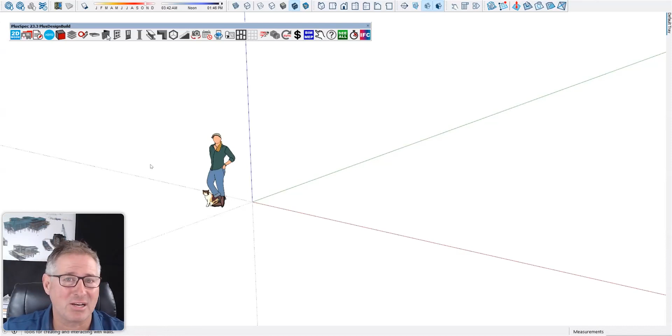All right, I'm with Grant. Grant, what we might do is start with steel frame. A lot of our users have asked for it, and I'd like you to start showing just a couple of things on steel frame. So maybe just draw 2 walls and put a window in or something like that.

So first thing you do is you go down to framing. Select here, go to the steel option. Then update all your options in here. You'll have your steel materials in here that we've got. Select all your materials, go down here, make sure everything's all good, and then we can start drawing.

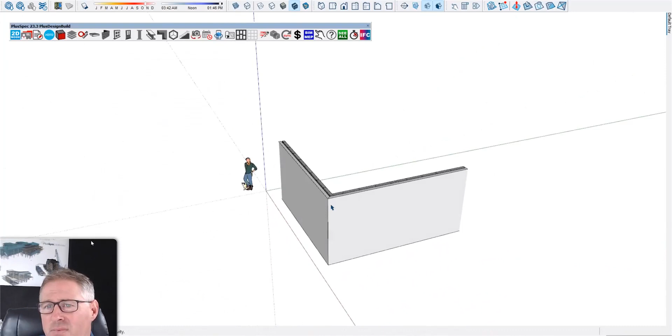So just draw 2 walls here. I'm drawing the wrong way. I'm pressing insert. Down arrow 2 is what you just did too, so down arrow allows you to justify internal, external. Insert or down arrow, guys. So insert will flip the direction, then down arrow will change at what point you're drawing the wall from.

Let's zoom in on that frame. Right, you can see it's all C-section now.

Can you just quickly make one of them a gable? Yep.

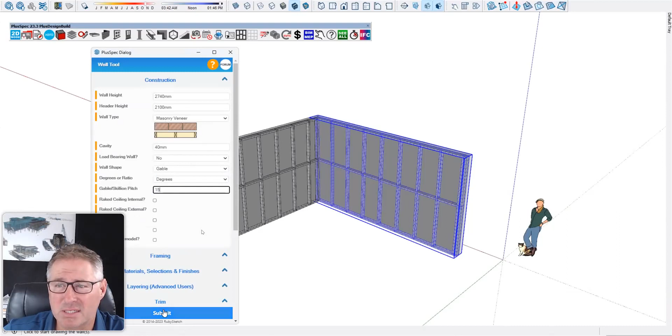Now, this will still work in the Takeoff, guys. We are working on an export that enables it to be used with a CNC machine. So if you guys are using CNC cutting machines, it'd be nice if you gave us some feedback to see if we can help you out.

Right, so basically this is the way that steel frames. Now, guys, just to be clear, I'm not a steel frame expert. To be honest with you, I don't really even like them, but I know you guys do. Add a window, Grant.

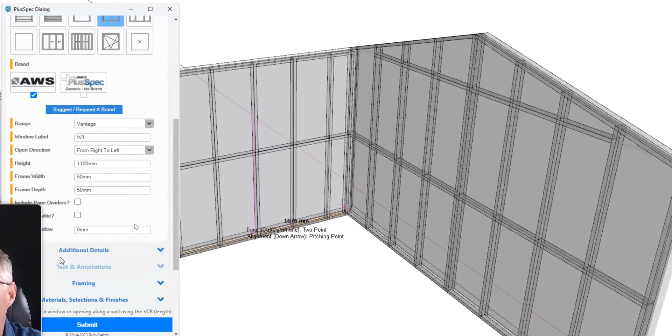Maybe a trussed header. So truss here.

Okay, let's have a look at that. Can you just turn your cladding and stuff off so we can look at it from both sides? Just create some scenes.

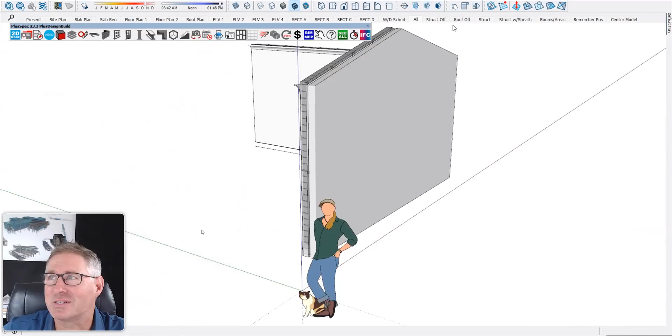Guys, I'm not sure what stage you create scenes, but it's really important to create scenes early on in the piece because it enables you to work faster. Go to structure. It also makes your computer run quicker.

So if you've got a computer that lags a little bit and you create your scenes, basically we're dealing with less geometry. So if Grant went to all now, they'll see all, that'll do. It takes a lot more for SketchUp to actually show us that than what it does to actually show the structure. So just a little tip there.

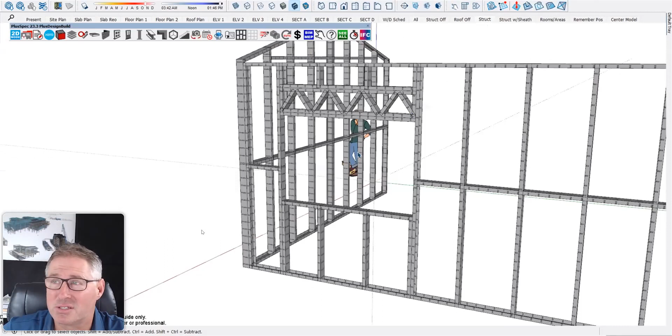Right, so that's our steel framing. You can also put battens off the side of the steel frame as well. Do you want to do that? So I'll explain it a little bit.

So steel framing, and you've got battens, and this is probably going to be... that's all right, just do it anyway. Okay, he's done them on the inside.

Guys, if you're in Australia, you'll probably know that the code has changed and really having problems getting steel batten walls to steel frame walls to comply with the code. So you have the option to choose timber or steel battens.

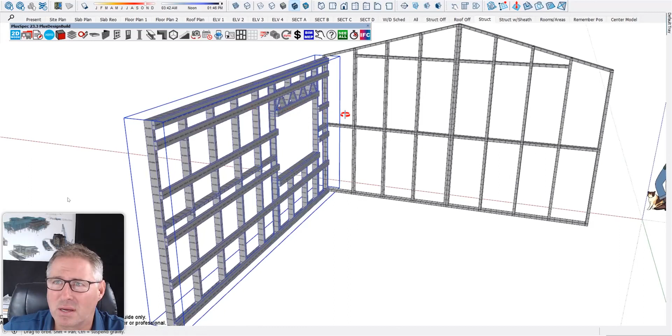Grant, there was a little bug that we just picked up there. Was that just not on the outside of the wall, or? Just with this wall type. Okay, just that wall type. This is a brick veneer wall. Okay, right, it's a brick veneer wall.

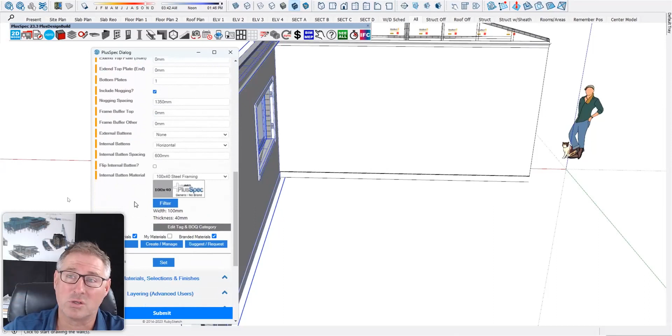So if you went to clad wall, you'd have the option to add it. And guys, you're going to need that. We're also working on aligning battens to studs. So for instance, if you've got a drop off, you're going to want your timber batten to probably go to your drop off, but we'll have an override as well. So either your timber batten works to your drop off, or it will work to your step down for your concrete slabs or joists. Just put the timber batten in there, mate.

If it's not there yet, we will be adding it. Is it there, Grant? Can you add timber battens to that wall? So I added steel battens to that wall just to show the steel on both sides.

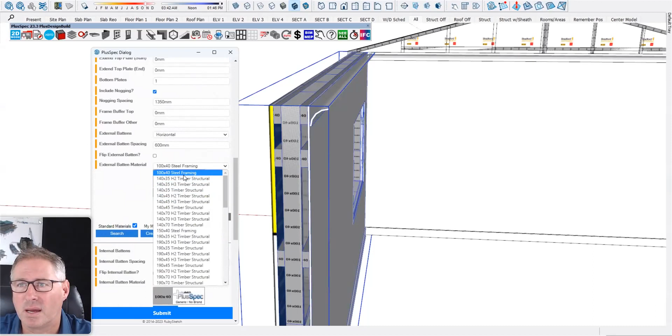Scroll back down. External is this one here. Yep, we can add in timber, they're all on the same list. Add in timber, make it a 70. Some of that we're used to seeing, it kind of looks weird. Yeah, this one here, that'll do.

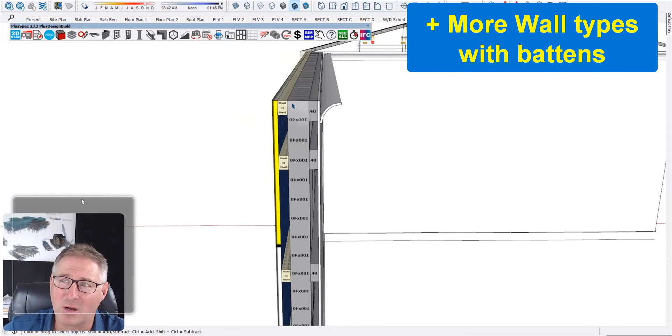So basically, if it was a vertical batten, you could get that to comply, or you can insulate in between it. You're not getting conductivity between the external and internal, and I think you'll find that most steel frames these days actually have to have battening on the frames to get them to comply. So that's why we did it, guys.

Grant, have we done trusses yet, or is that still in the works? Still in the works. All right, so trusses will also be done in the future. Give it a test out, guys, any feedback much appreciated.

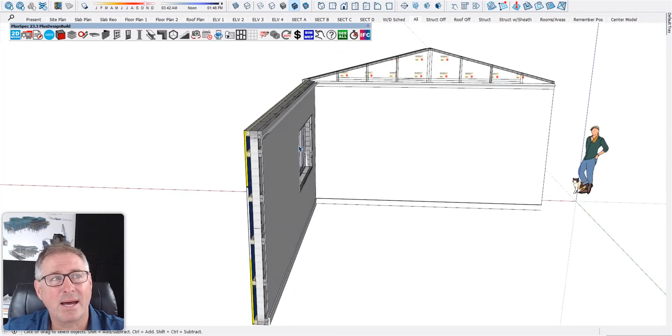So a couple of the wall types we added battens to, the internal only and double internal masonry wall types. So double masonry, and the reason being is similar, so a lot of this comes from Passive House guys that were doing special insulated walls. Just draw it, mate, when you can. No, don't just use timber flooring, mate.

Timber, this is a double masonry, so we won't see it. Oh okay, here, right, just the top plate you'll see. So this type of battening actually enabled us to get the R values or the insulation values required for walls, especially with Passive House.

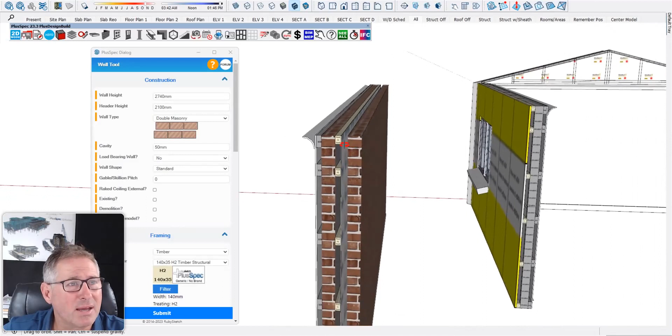What other walls do we have there? We got double internal and double masonry wall types. So sometimes you're going to use a double internal as a party wall, and getting the right information on your party wall was important. So you can see that we've got that battened as well.

And you can save these as vignettes, guys. So if you're doing this standard, you can create as a component, right click, watch the vignette video, guys. This is not a tutorial, it's just telling you some of the major things we've done. And by the way, there's more than 100, probably 150 different changes in this to other things.

A lot of them are bug fixes or improvements in usability, for instance the down arrow for justifying a wall left or right. But yeah, just give it a good solid working, try and break it if you can.

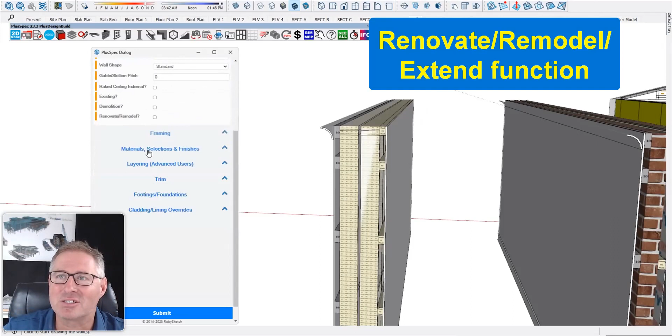All right, the next thing is ability to specify which materials are... okay, renovation and extension. Guys, I've been asked this question a lot of times. Now Grant, just slow down. Right, renovate, remodel, show us where that is.

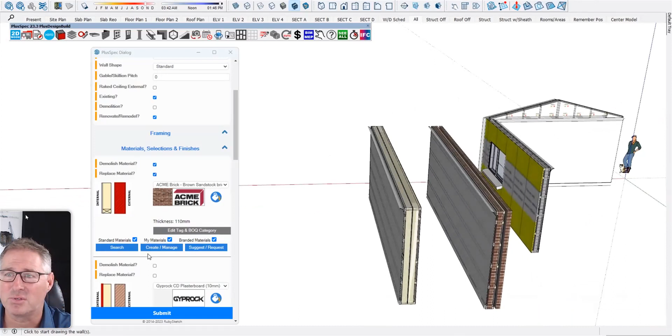There it is, yep, right, okay, click it. So what is clicked is renovation, remodel. And what that's done is it's actually given the ability to click on a demolished material or replace material. So, for instance, you keep going with that, Grant. Just draw that and we'll just do a takeoff of just one. So what he's done is he's demolished and replaced that.

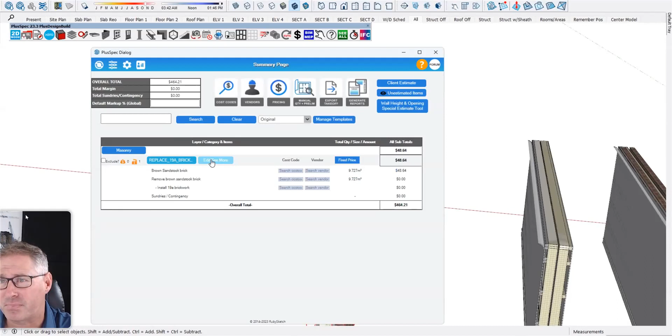So right-click, takeoff selection. The material that he replaced was the masonry, therefore it's quantified the masonry and also said how much has got to be removed. So one's a purchase item and one's a labour item. Throw it in the bin. That's important, guys, and because...

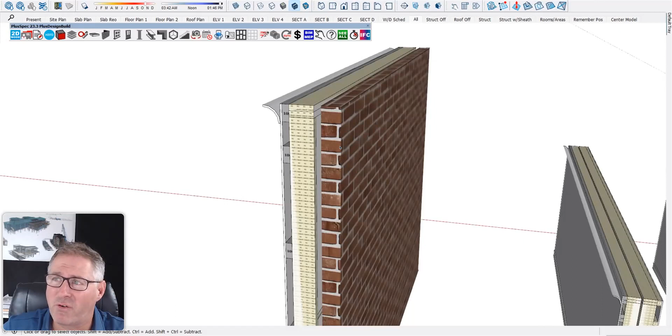Let me just grab your screen for a sec, Grant, let's get rid of that. Okay, so if you're building a house and you had multiple walls and you only need to replace the bricks or the cladding or the internal lining or something like that, the benefit of this is that you can just replace it, quantify it, and it's still locked. So I can't move that wall. You notice it's red, but it gave a quantity out of it. That's a big advantage for you guys doing renovation, extension, remodel work.

So again, we go to the wall tool, and I'll just move this over just a touch because my mug's in the way. Renovation, remodel, click it here. Obviously, if it's going to be demolished, that means you're going to rip the whole thing down.

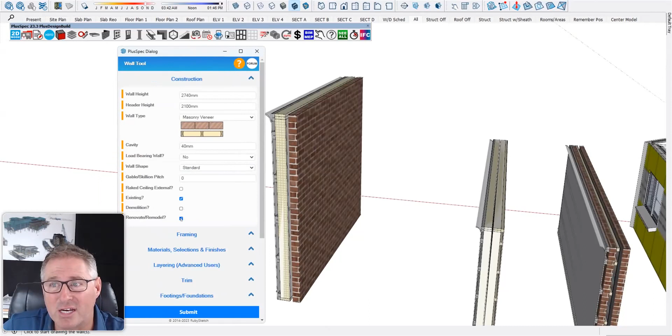But if you are going to just change some materials, again, go to your materials. Inside of your materials, choose which ones are going to be replaced or demolished. So just say the gyprock on this one here, and go submit. Now I should only get gyprock in my takeoff, takeoff selection only.

Internal finishes - you can see it's under replace internal lining. So you're going to remove and replace because I click both to give you the quantities, and that'll get your remodeling extension reno business happening really quickly. I think it's going to be an advantage.

Grant, are they on a layer, or how can you turn those off individually? I don't think they're on a layer just yet. We may do it - let's just get some feedback from our users and see what they say.

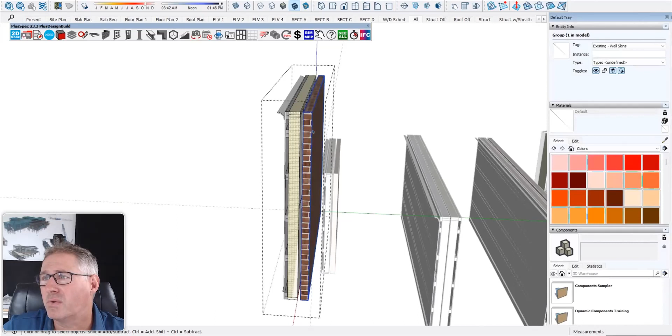So this brickwork here - this would have been 19A brickwork previously. So it's still in the original existing layers. Okay, righto, so we might change that, guys. We'll be open to some feedback on that one.

One thing with that feature as well, it's not just in the wall tool - it's in a bunch of different, like the roof tools and things like that. That's a good point, because you might be just replacing the roof.

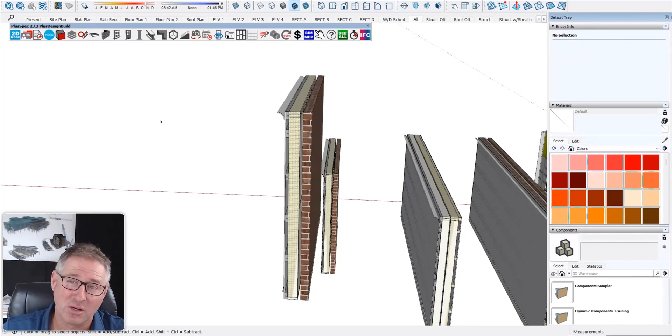If you're just replacing half a roof, guys, you're going to need to use the skillion tool to draw half of the roof you're going to replace, because we can't distinguish on a new roof. But I would probably draw a roof.

I'd probably do something like this - rectangle, let's just say this is a hip roof. Create roof. So this is going to be an existing roof. Existing, go submit, right.

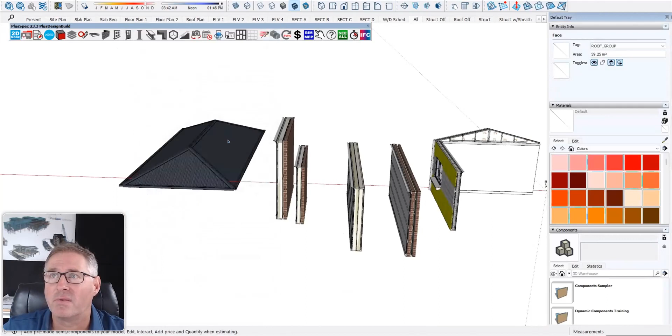But now if we had to replace a part of this roof, one of these sides, it'd be right-click, roof, remove face, isn't it, Grant? Correct, about halfway down there on your right. Yep, remove roof face. Right, and now you can actually see that that's done.

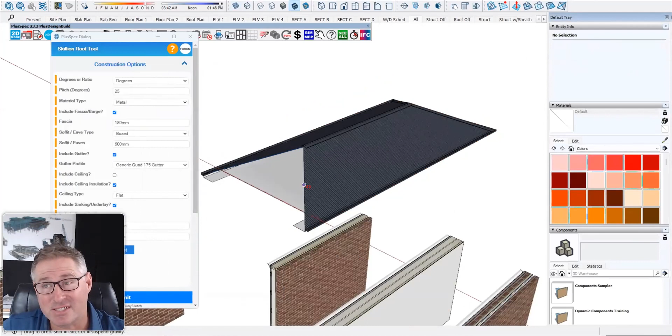And what it's also done is opened up the skillion roof tool, which enables me to do - and this is going to lead into something else as well in a second, which I think you guys will like because it allows you to edit the skillion roof tool. So I could bugger this up straight away by not turning my overhangs off.

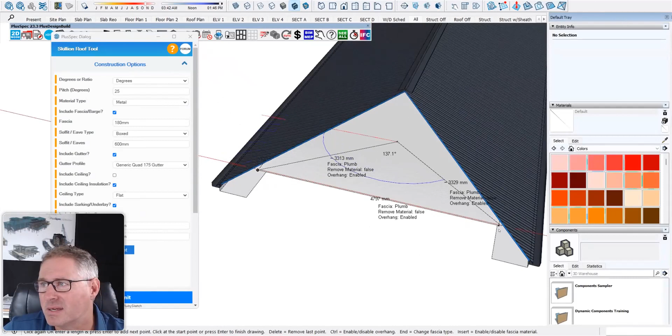And usually here you'd have to push delete, remove, control. Now I'm not going to push control here, I'm just going to quickly get this done. Right, and you can see what the problem was - my overhang was incorrect.

Now if I actually go under here and go right-click roof and edit overhang fascia details, I can now change which side I want to do. Now, as you would know, guys, this would be a huge pain in the bum to do before.

I'm just going to make this 1 mil because I don't think I can go 0, can I, Grant, or can I? You can go 0. Right, you can see that I reduced that.

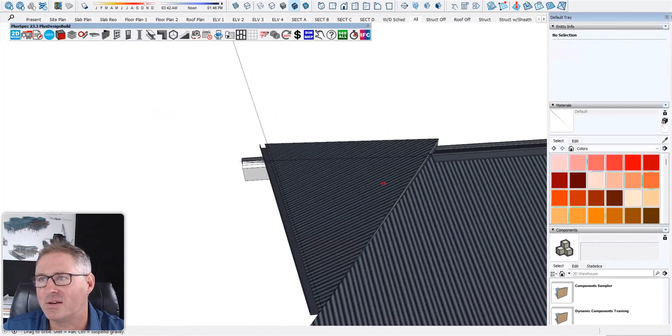Obviously I didn't want to reduce that one, but if I did, I'd go again - roof, edit roof overhangs, and I'll make it a 0. Right, and again I do the same thing, keep on going. This is a huge time saver when you're doing sloping or skillion roofs.

Maybe that was 2 different pitch roofs, I'm not sure, or I didn't draw it right, but regardless, that's how to do it, guys.

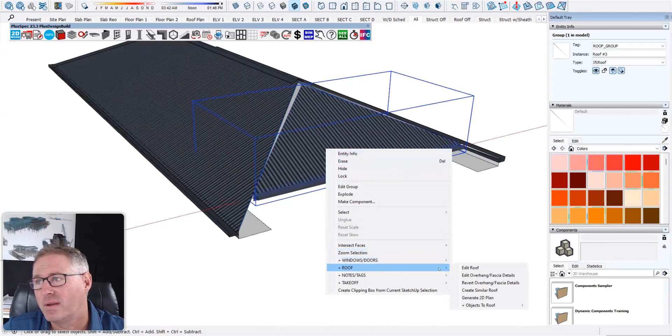But what I probably should have done with this - it's actually a new roof so it's not so bad - I could have edited the roof, and I could have just replaced one thing.

So for instance, if we went to renovate, remodel, materials, selections, and finishes, I can just replace just the tin, and therefore my fascia and gutter would stay. I think that's kind of important.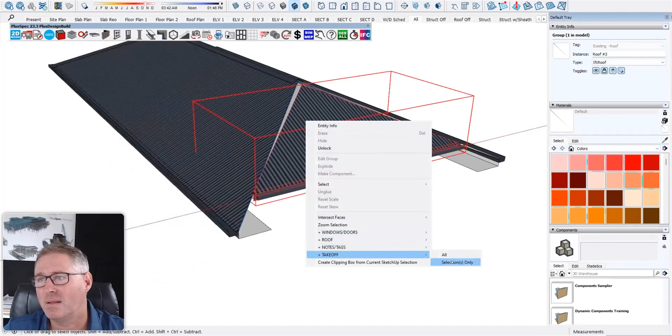Let's just check that - right-click, takeoff selection, roofing. And now you can see I'm just replacing one part of the roof. It's a bit of a game changer for you renovation extension guys.

I think you'll really like it. I'd like to hear some feedback if you've got any. We are still doing a little bit of work on it, but I think it's ready to be released. Grant, you got any objections to that one being released? Nope, not at all, no.

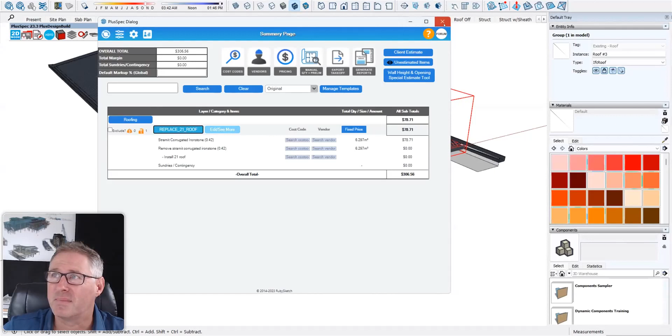All right, good. So that was basically the roof skillion overhangs, guys, and that works whether you're going to do it as replacing a roof like this or whatever it is you're going to do.

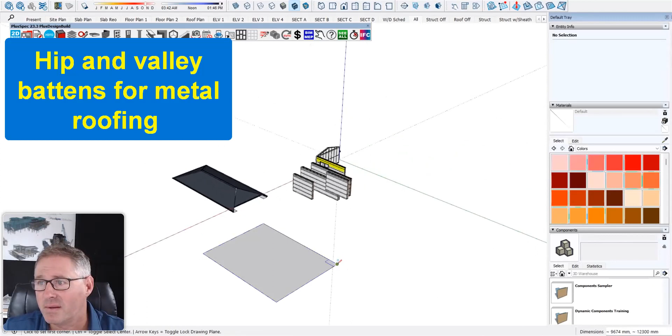That one there works - hip and valley battens for metal corrugated roofs. It's going to be quicker to draw another roof here, isn't it? I think so, yep. This one here was a bit of criticism we got when we were doing videos from the hardcore roofing guys. Create roof.

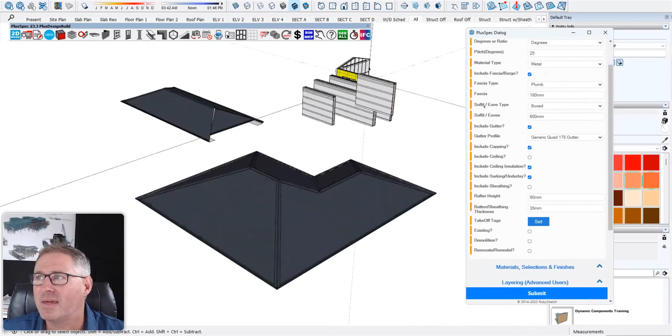I'm going to move this over to here because it's in the way, and I'm just going to create a new roof. And then what I'm going to do is add my battens and my rafters. So triple click to get it all blue, right click, roof framing, create roof framing, which has been there for some time.

However, now we have the ability to add underpurlins, just because I can. We've got our batten spacing and batten offsets, which we haven't marked out yet. You'll notice if I've chosen metal roof, it means I'm going to have a batten offset from my ridge. 160 is usually standard, but depending on the size of the valley boards or ridge capping you're creating, that will actually enable you to edit that.

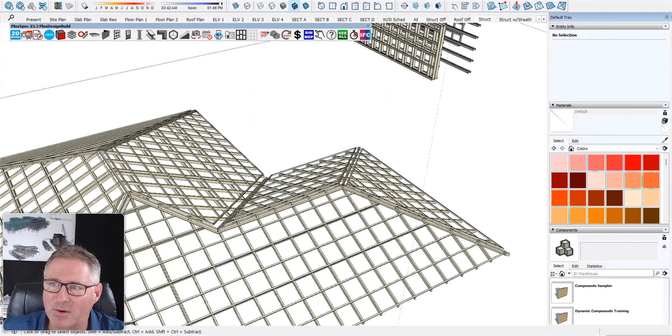Right, and as you can see, we now have battens that go up so we can screw our ridge cap to. On a tile roof that wouldn't happen, guys, so you would choose tile roof if you're doing tile, but your valleys will still happen on tile roofs. One thing to note, they're tagged separately from the other battens, so you know which are your valley battens, your hip battens, and your ridge battens.

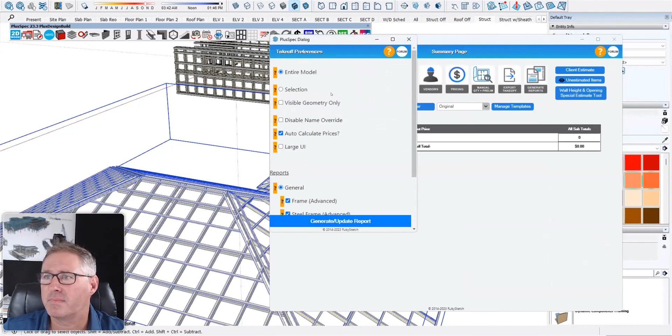So if I went to take off selection only, is that what you're saying? Yep, so I wanted to double check advanced framing is ticked. It is ticked. Good. Yep, I think it's, yep. So I don't need to worry about that.

Framing, edit, see more, creeper rafter - must be right down the bottom of the list. There you go, valley rafter. There we go, those. Right, so that is there. You guys can change the names of these as well.

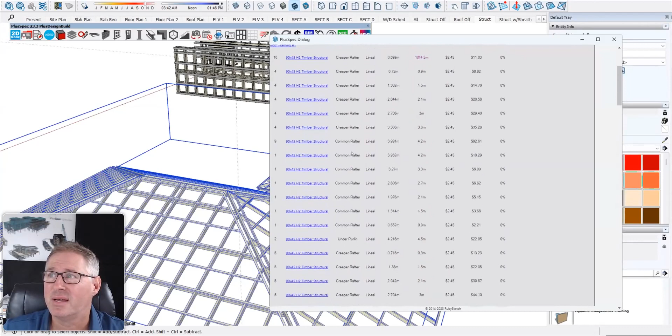Is that correct, Grant? Yep. Okay, so you can go through and change the names of these items to suit what you call them - we can't, everyone around the world seems to call things slightly different. You can also send a cut list of this, a cut and order list. So export order lengths, cut and order list, which basically means what length of timber did you order it from and what you're going to cut it out of, so if you've got guys on site, they know not to cut the 4.2s into 2.1s.

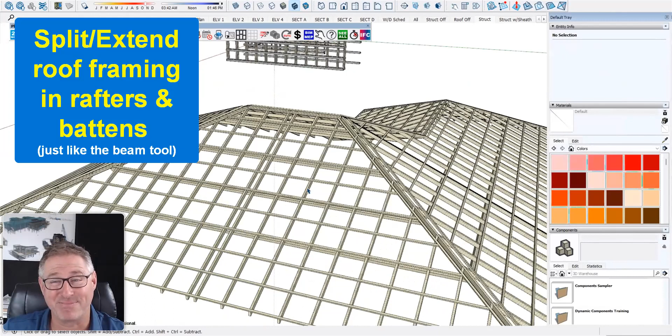Grant, I'm going to let you take over. I'll just close this down for you. Mate, if we want to put in a skylight, it's always been a pain in the ass - can you show us this cool feature we've just added? So for any roof penetration, I'll just talk while Grant's drawing.

Right, you can now go through. So what Grant did - just go outside the roof again, Grant, so we can see that. Just hit escape and get outside of it altogether. Just draw a quick chimney, mate, or a rectangular prism through it so we can see what's going on.

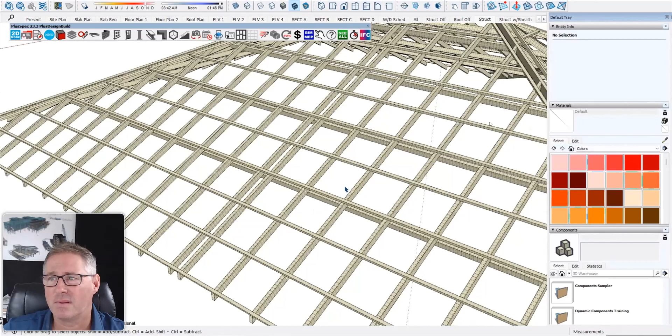Well, don't worry about that, doesn't matter. Oh, it didn't like it. Give me a sec - no, because it's drawn on something else. Right, just move that into somewhere, just at the end of the roof or something. We'll get the idea. There we go.

Okay, so if you had something going through like a Velux or a chimney or something like that, this used to be a pain in the ass. So Grant, show us how to do it.

Yep, so click into the roof. Double click, triple click until you get one thing blue - is that correct? Correct, until you get down to the individual beams or rafters. Right click, so then we select to split it. What you can also do, before I do that, is multiple at once - so if I select, that's handy, two by holding shift. Right click, beams, split beams.

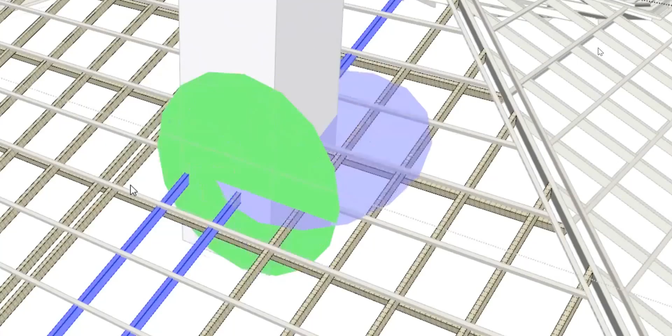And this works the same as how the split beam tool works - exact same. So we find the plane we want to do it to, say to here. Left click, go around the other side, same thing, left click.

Press enter. Okay, now I've got hide rest of model on my computer here, so I can look in just this section. I can now select both of these two, click delete. And now, as I just moved that, you can see I've got the cut in here.

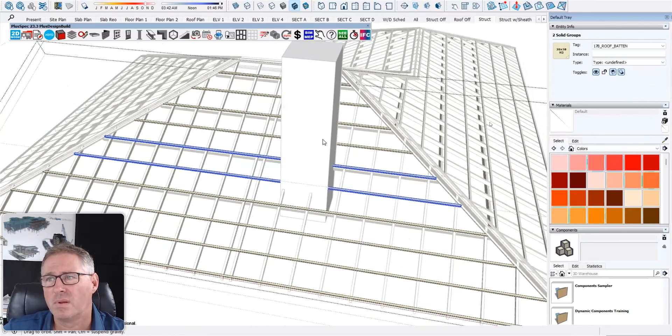Now I've got the battens going through. I'll turn off, hide rest of model. Select the two battens, it's the exact same process. Split them, select your plane, all your planes, hit enter. Again, I'll hide rest of model. Come back, unhide, and there we go.

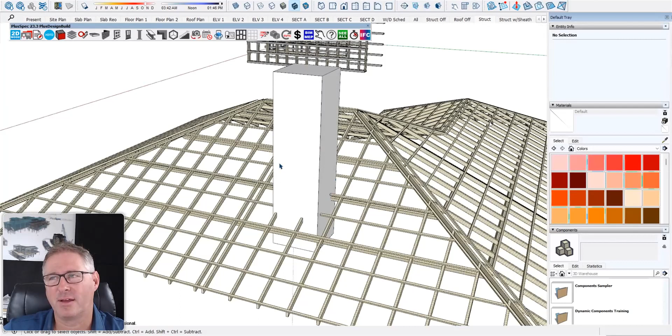So, beam - I usually have a keyboard shortcut for beam, it's B. I'd also say do this as well. Hold on, just slow down, my head's in the way there.

Okay, so takeoff tag - what is this you're doing? So this is for the guys that want things specified in specific areas. If you want it to estimate as a specific member type and then group together with other things, it'll do so.

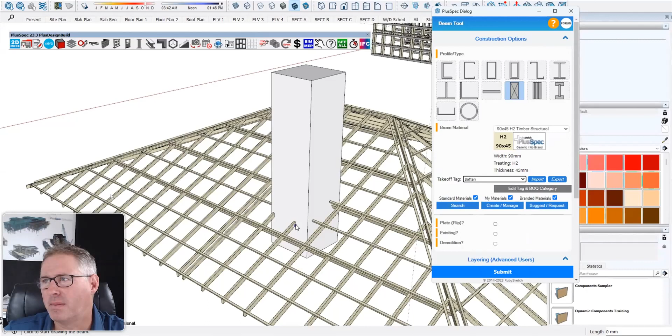Might say do a batten just for now - good idea, top of the list. You're gonna need a batten at the bottom of the chimney there, so I'll just do it here. Just say it's that - you can flip it and do whatever, but then you can move it down into its spot, say it's about there, for example. You can do that all the way around.

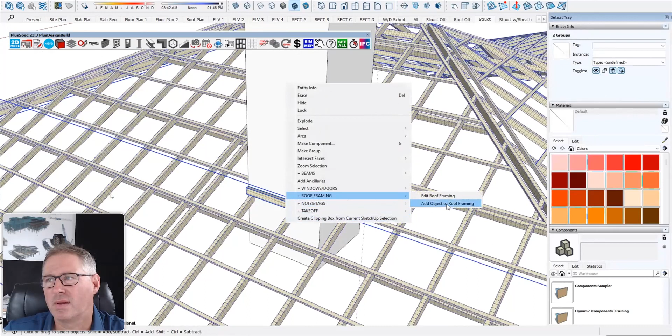Once you have that selected, select the rafters, right click, roof framing, add object to roof framing. Now when you do a takeoff of this, it'll estimate them all together. So if we go into framing here, this is one I just added. If I had named it as test, it would have been called test, but that's the one we just added in there. So it's now grouping itself together so you know where everything goes.

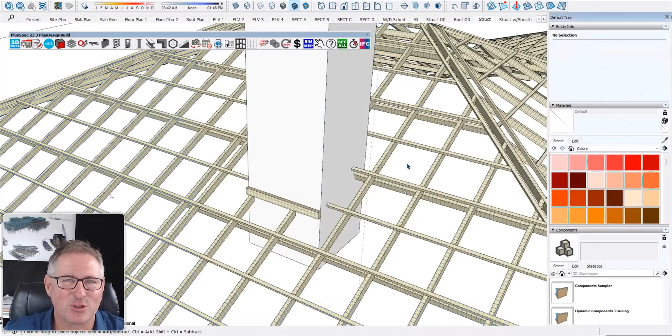So guys, this is about virtually building a project, and that's what we've been banging on about for so long. We're so close to being 100% through virtual construction that it's not funny. We're a big step ahead of the major competitors in the industry that are so-called BIM programs, but they're actually hollow shell drafting programs. So yeah, I think this is a huge benefit to enable us to move forwards.

The only thing we're yet to work on - if you just go all there, Grant - is to cut a hole through the roof. We will be working on that next. But at the moment, to do that, you do need to use a rectangle tool and delete those faces, but we'll be getting onto that one lickety-split. Right, what else have we got? Is there anything else you want to touch on, Grant?

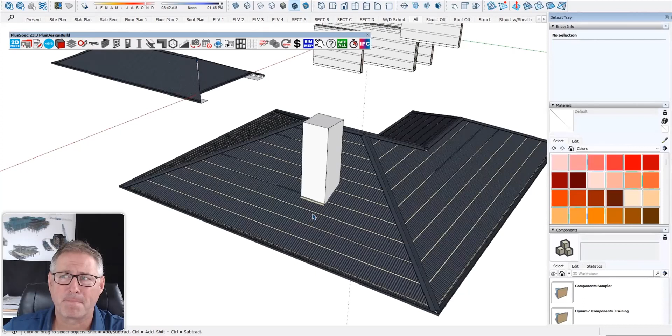Nothing on that - one thing I just thought of back with the skillion stuff. I know previously we had issues where users weren't able to have different overhang sizes. I know you touched on being able to reduce it, but this will allow you to have 0 or the common overhang, and then you might have one that has a different value. Are you talking about on a hip roof or a skillion roof?

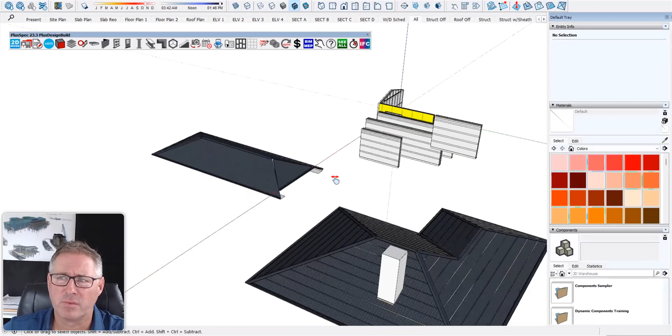Oh, a skillion roof. So just to make my life a little easier when drawing this, if you've got this sort of shape, but maybe this edge here of the skillion has a larger overhang, you can just have one as a different overhang. You don't have to go - just quickly show us, mate. But yeah, I know what you're talking about.

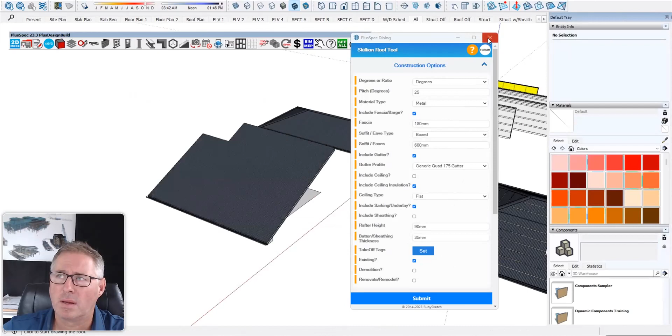Yep, so do this - it's skillion, let's quickly draw this up. I'm just going to keep it as the default size, and this still will work as well if you do. Okay, so at the moment he's got 600 overhang all the way around.

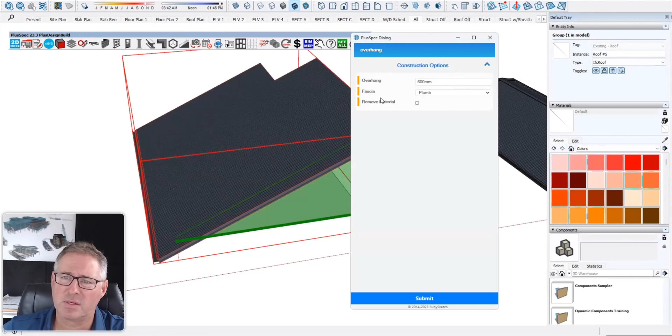Correct. And one thing to note as well, even though if you had drawn with a 0 overhang on one side, this edit, if I had it existing, that's not going to affect it. But even though I had it as that, if I had it as 0, this will overwrite that. So you can then change it after the fact as well - it doesn't take that original value. Okay, so change it, make it 1800.

1800. So you can now have independent sizes of this one here to do the same thing. Roof, edit overhang on this edge here. It might just be 0 on this one, or whatever it might be. And we can then start really molding around what we want to do.

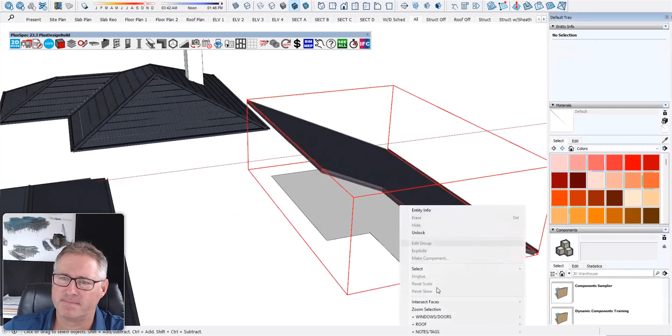You can do other things as well, basically the same sort of options as when you're drawing it, like removing the material. So say, for example, there was a wall butting up to walls, remove the material, submit, and it removes the fascia material. So for the guys estimating, they're not getting that additional quantification.

That's a big benefit. The only thing you can't do is go minus figures there, from the original point, can't go back past it. So if you ever need to do that, just move the line in. All right, good. Is there anything else you want to touch on roof? That's good, we're going to need to move on, everyone's busy. No, nothing with the roof, I just thought of that just then.

Okay, good. All right, so we've got the slab tool, reinforcement in the slabs and footings. We've spent a lot of time developing this, guys. Grant's going to show you.

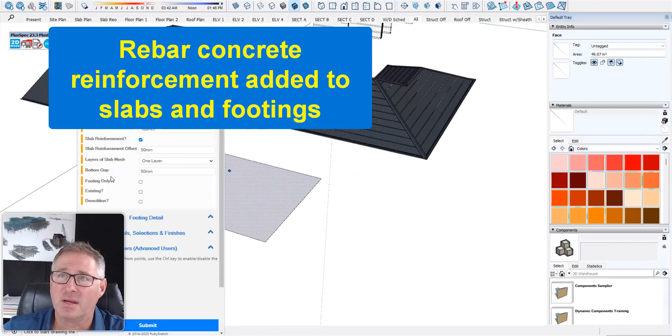Okay, let me move my head out of the way again. All right, it's done. So we've got that slab on the reinforcement. So we've got the reinforcement here. Setting in different values, whether you want 1 or 2 layers.

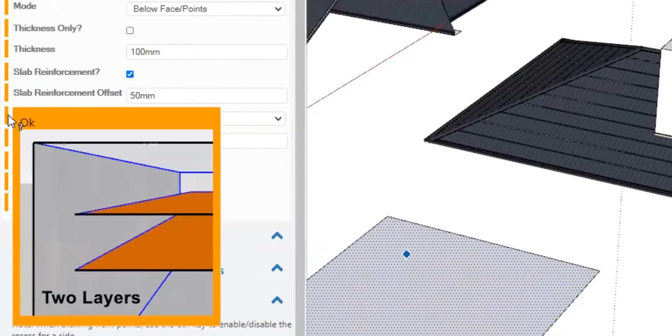Have you got images in there yet? I think you have, just hover over the hover text. Text, 2 layers, offsets, yep. Whether the slab reinforcement and whatnot. So that's all good, and you got your footing details as well.

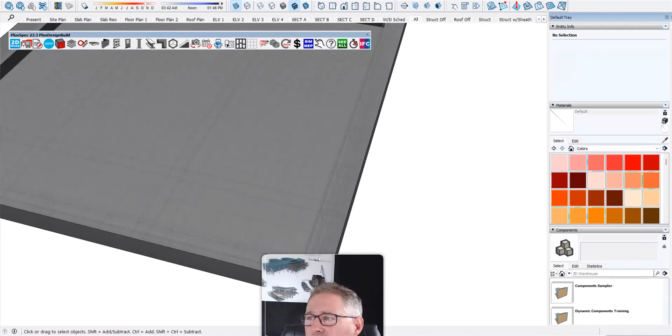So do this and do transparent mode so we can see it all together. Can I just grab your mouse for a second? Just one second, I'll move my head again because I'm on the other side of the screen now. Materials - guys, the best way to deal with this.

Tags, go to floor, turn your slab off - you can see your reinforcement there. Or what Grant showed was clear. That's really handy. Do you want to add some footings in underneath that, Grant?

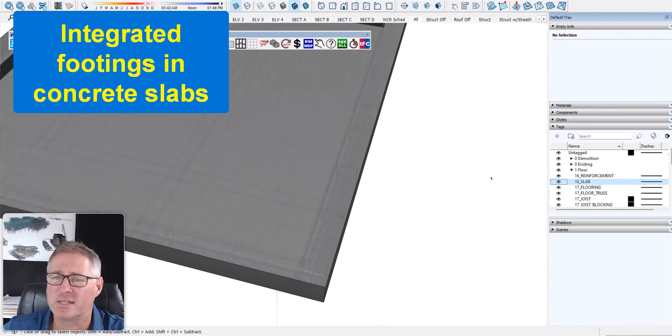Yep, so what I'll do, I'll just do it underneath - I find it's easy to do it underneath here. Me too. So if you right click on the slab, go to custom footing tool, add footing. You can make these things in here. I'll also add the reinforcement.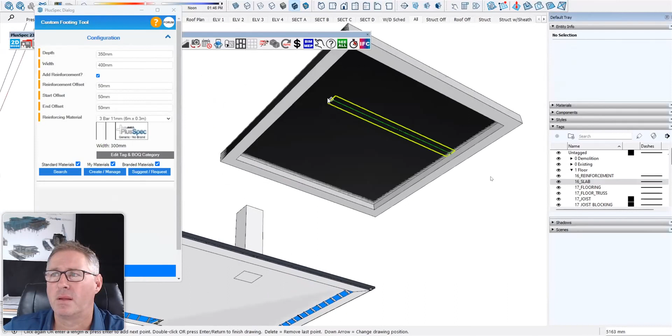And now we can start adding internal beams, whether it be for - is it waffle pod slab? The terminology is whatever it is. Double click to do that. You can make the whole grid section underneath, or you can do it if you just needed to reinforce this bit here, for example, all the way. You don't have to go all the way there, you can stop here. Double click to finish it, and you can intersect them all and whatnot.

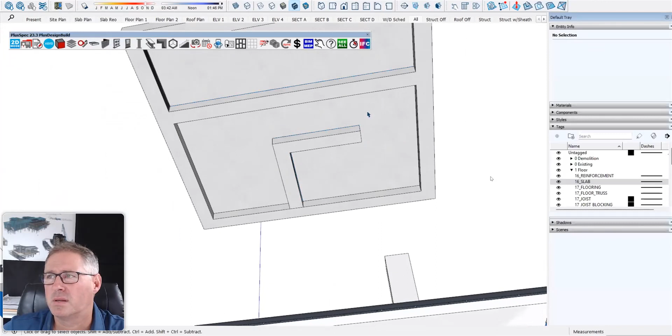Now if I go back and turn this off, we can then see there's reinforcement there. Again with the transparent - can they create materials for that yet and put their own rebar or reinforcement types in? I believe so, yes. Okay, good, that's another big one, guys.

Virtual construction, we've been banging on about it for years. I think we're there - well, we are there, but you know, you can always add more. You can add a void through everything.

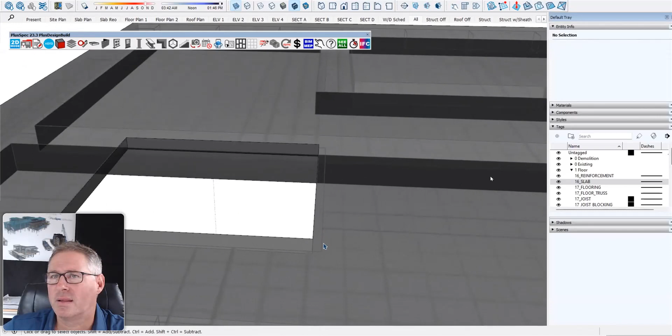And then the reinforcement will offset whatever you entered in before for the offset there as well. That's really good, I think it's a good update, guys.

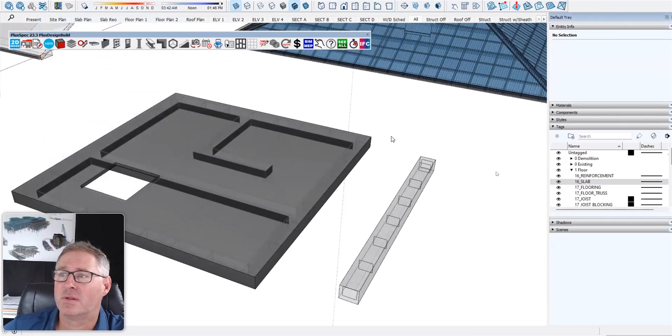So you guys in the concrete side of things, and I know there's a lot of commercial builders that use the software, this should really take you 10 leaps forward and save you a shipload of time. So it's also been added not just into the slab tool and the footing tool, but also the footings that are drawn in the wall tool. Hold on, I'll move my head again.

Yep, right up, include footing, include reinforcement. I'm just going to draw one wall so you can see - the footings are in there, the reinforcements are in there as well. Across the board, wherever there's slab stuff, we've added it in there.

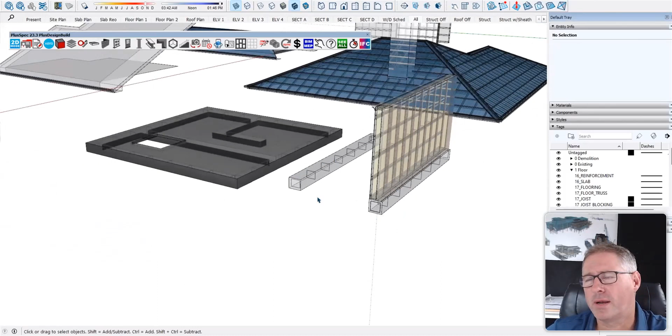All right, can you just turn the rebar on so we can have a look at it, and turn your slab off so we can look at it. I'm going to explain something - it would have crashed your computer, or you'd have needed a crazy powerful computer to run it. These are images that actually represent the rebar.

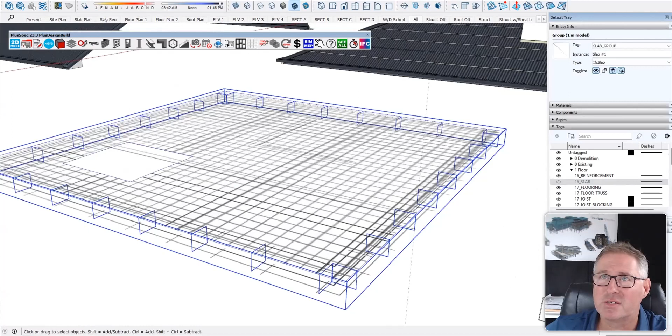You'll notice if I go to slab rebar, Shift Z, it is showing from above. So you can see that. That's kind of all you really need, because we could draw every round little bar, but before you know it, you'll be complaining that the software runs too slow.

Anything else you want to add to that, Grant? No, that was all for that.

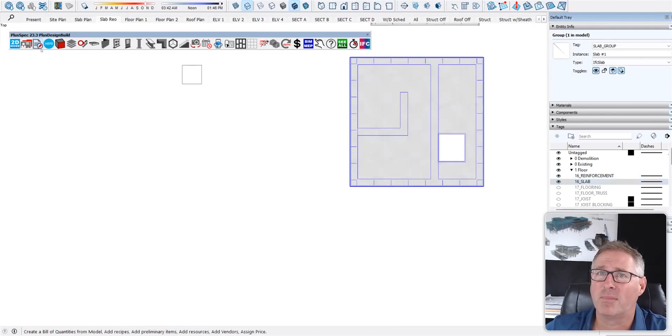I want to do takeoff by level and by layer. So we want that starting thing to show up here. Oops, wrong one.

Okay, so what I just did, guys, was now when I do a takeoff, and you guys will probably be used to seeing this, it now gives you the opportunity to choose how you want to do your takeoff. So you've got visible geometry, disabled, name overrides, and you've got large UI, that changes.

But takeoff by level and layer, Grant, have you not got it installed on this computer? It might not be in this version that I've got installed, no. Okay, just need to make sure that goes out in the beta. I can't really show you on this computer, but here's what it does.

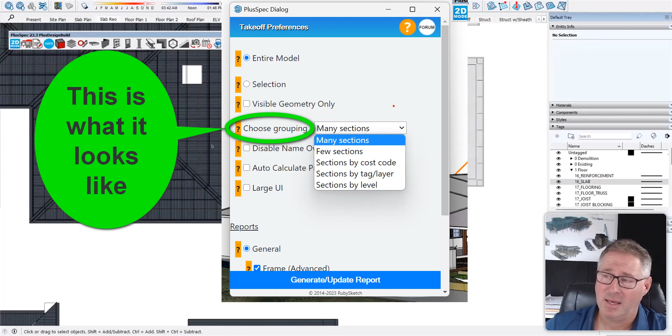Essentially, when you are putting your own cost codes in, or you want to quantify in a way that you understand, takeoff by cost code makes a huge difference. You will get it in the next beta, and we will make sure it's in, because that enables you to understand the takeoff in your own way, naming things to do.

It's a huge benefit. Also, the client takeoff is a real cracker as well, because you're going to have a formatted takeoff that you can turn into a quote that you'd send to the client, and I think that's a real benefit. It does sync with Xero, guys. Give it a test out, see how you go with it.

Is there anything else you want to add to that, Grant? No, that covers it all.

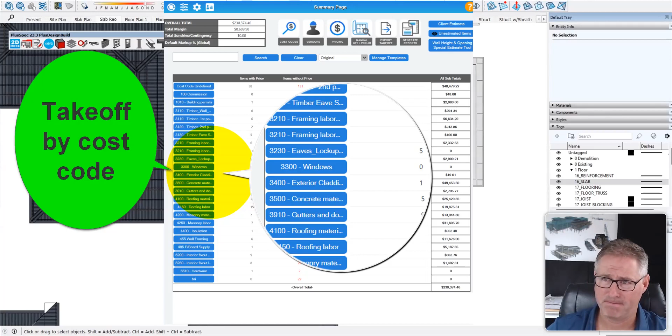Door jambs, that's one other thing. Do you want to quickly just show that? Door jambs in your BOQ.

I haven't done any doors yet. Door, that one. Door jamb.

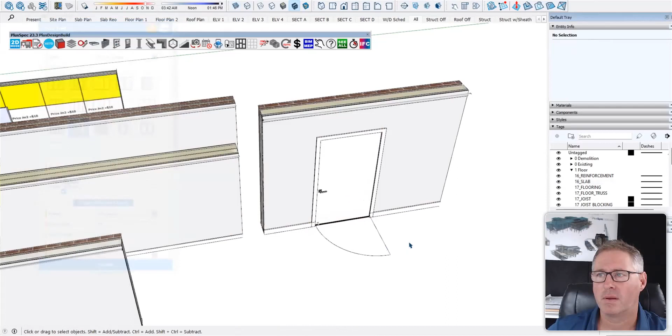Okay, just take that wall. Ah, it's an existing wall. Just draw it, yeah okay, do that. You just click W on your keyboard, it makes it easier to edit. Yeah, I've got it set up. We'll go with that. So the reason why that one wasn't going to work, guys, is because of remodel.

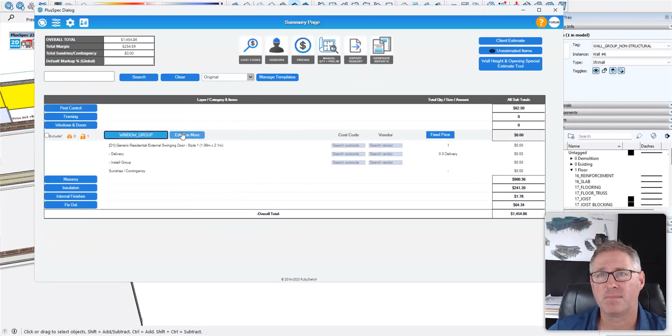Doors, just search jamb. Okay, timber door jamb. See the size that Grant put that in, and the height that was set in your header height is now, and it's also figuring out whether it's hung right hand side or hung left hand side.

It's an oversight, we didn't have it in there before. Door jambs are in there now. Is there anything else you need to add to that, Grant? I don't think so, that covers it all.

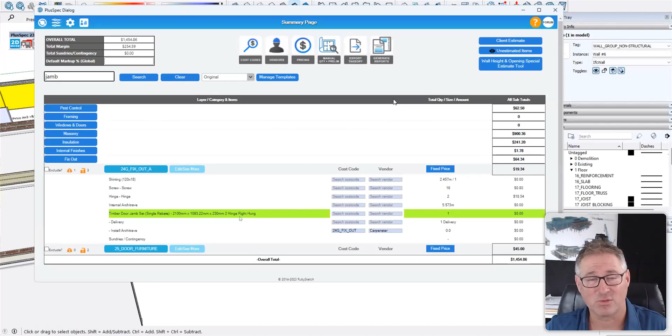A couple of things for the US guys as well - decimal places and having 5 or 10 of them was just a pain in the ass, it looked terrible. That's fixed as well, guys. Let us know if you do want to change a decimal place, you can click on it and go to X amount of decimals that you choose. However, it's just broken it down, so it's just 3 decimal places by default, makes it look a lot cleaner and easy to use.

Grant, is there anything else you want to add? I think that's the main things I had on the list, besides all the bug fixes and everything else. I think we're at a pretty good spot.